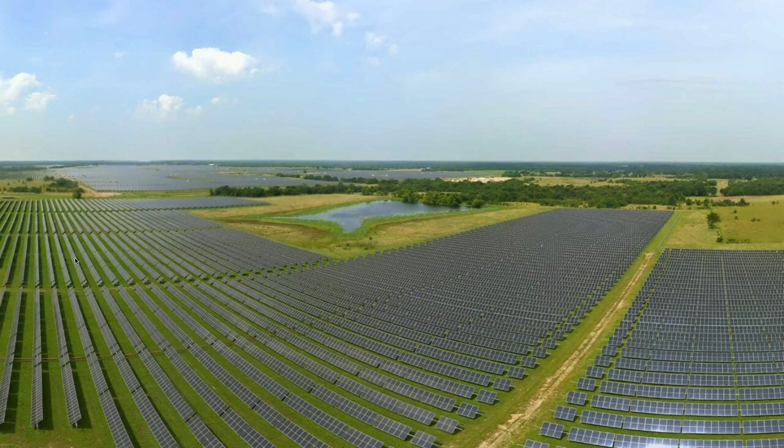And I think it's a gold mine in itself because it's got a huge amount of very valuable and critical materials. But the key is how to do it in a way that has a huge amount more integrity, and how to deal with it in a way that is economical and that can yield better results. So I'm going to share my vision with you today.

I'm a climate entrepreneur. I founded a group called the Longevity Partners Group, which was one of the fastest growing sustainability advisory businesses in the world. We went from 20 people to about 220 people in the space of 24 months. We've got offices pretty much everywhere, but I've stepped down as the CEO of the group. I'm now a board member to transition and actually focus on something that I'm equally passionate about, which is what we're going to talk about today.

So I've put a few slides together to talk about the current scale of the industry, the risk of sending it to landfill, the environmental cost of making solar panels. A lot of the stuff that we talked about today, it's not quite a repetition, but I'm going to do a bit of a deep dive into it. The scale of the issue, the methodologies that are being used today, are they right for tomorrow? And there's also a huge timing issue when it comes to solar panel recycling. The requirements from off-takers, and I'll talk about what the future looks like and the vision.

My other mission is to keep you awake, because I know that it's 3 o'clock, and I hope that I can keep you guys entertained.

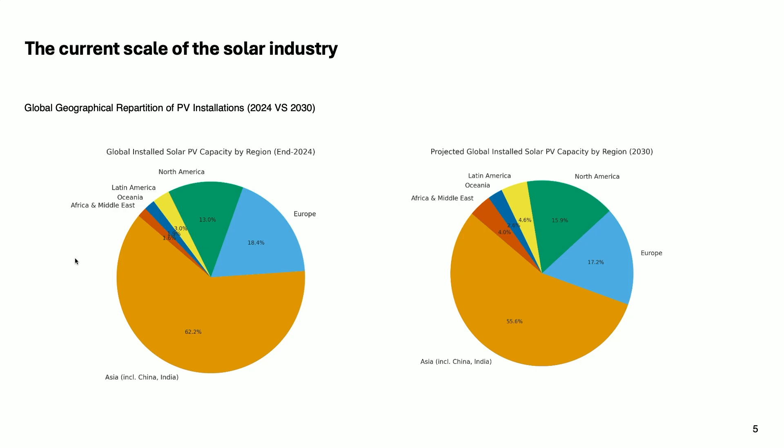So the current landscape of the solar industry, now versus 2030, or at the end of 2024, you can see that it's still very much dominated by China. And obviously, China is very opaque in terms of solar panel recycling. Nobody really knows what's going on over there. But it's certainly a challenge. And we know that they're very advanced when it comes to manufacturing and processing and robotics, et cetera. So we should hope that they're going to do something about it.

But what we can see that's quite interesting, I don't quite know. I'm actually going to talk about laser later, but I don't know where the laser is on this one. Oh, yeah, here we go.

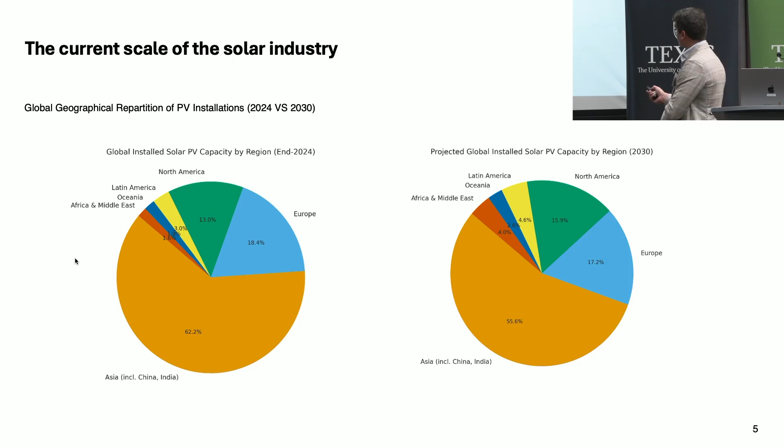We can see that the share of global renewables is reducing in Europe and increasing in North America. So that's basically the trend and where things are going. Obviously, Africa, Middle East, Latin America and Oceania are also growing.

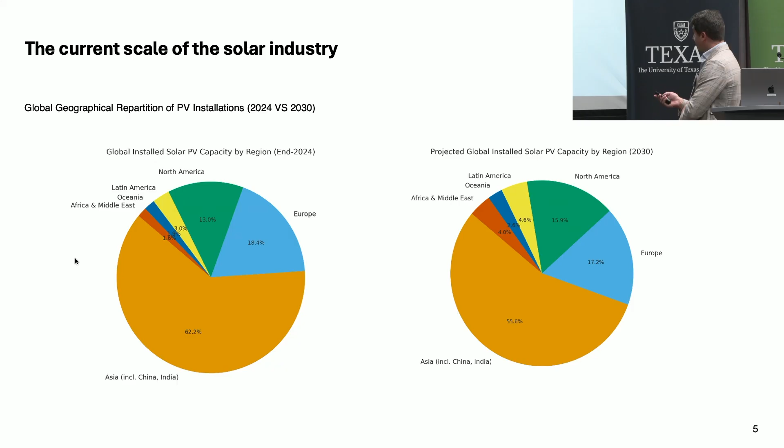So what's the real risk of sending the panels to landfill? The main risk is contamination. You've got an environmental risk through leaching, mainly from the cadmium telluride, the lead, the copper indium gallium selenide, CIGS films. And that leaching cannot be permitted because it has a negative impact on the environment.

But I think the biggest systemic issue is that you would be in breach of your European taxonomy and SFDR impact investment requirements. So, for example, if you have an infrastructure fund that invests primarily in renewable energy and you're basically causing significant harm, that's the concept of do no significant harm, you can actually be in breach of your SFDR regulation.

And what you can get on the back of that is claims of greenwashing. We've seen with Deutsche Bank, DWS, a few years ago, when they had a claim of greenwashing, the share price went down by 13%. So you can have basically one project that takes down a big chunk of the value. So if there are any large-scale or infrastructure investors in the room, that's one that you need to take into account.

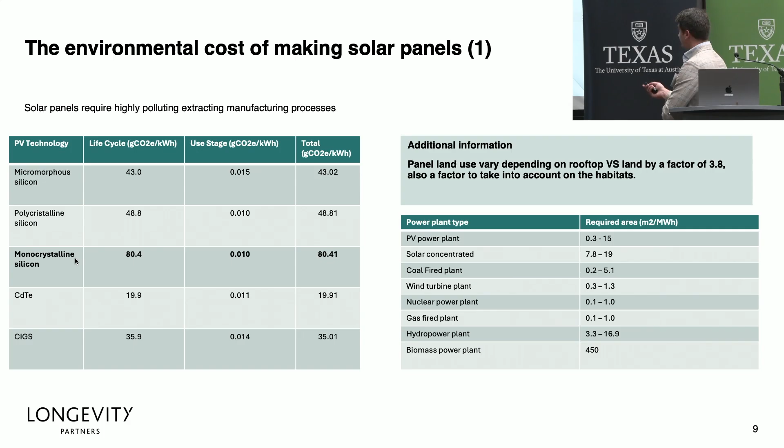We also talked earlier about the amount of land and the density of power production. And you can see that solar PV, obviously 0.3 would be for rooftop PV installations, but the required area in square meters per megawatt hour is one of the largest out there. The second largest after concentrated solar, and then hydropower plants and biomass plants. But if you compare it to wind turbines, coal-fired plants, gas-fired plants, nuclear power plants, it uses a lot more land.

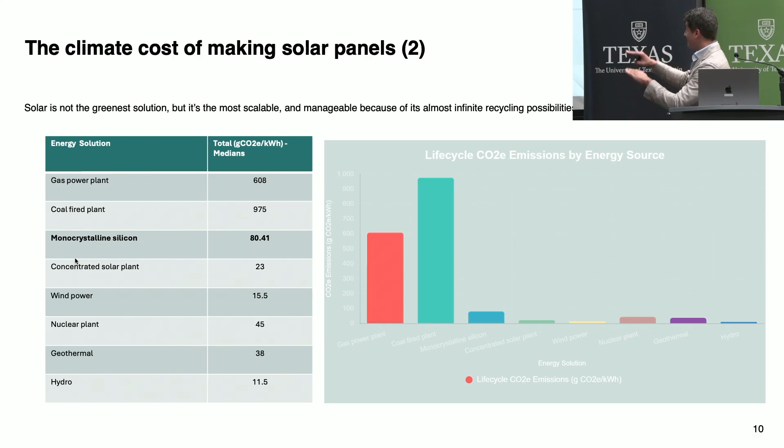So that's how it compares in terms of the life cycle of installations. So, the gas plants are better than the coal-fired plants. So that's the magnitude. But then here you can see that monocrystalline silicon actually has got a higher LCA compared to wind, nuclear, geothermal.

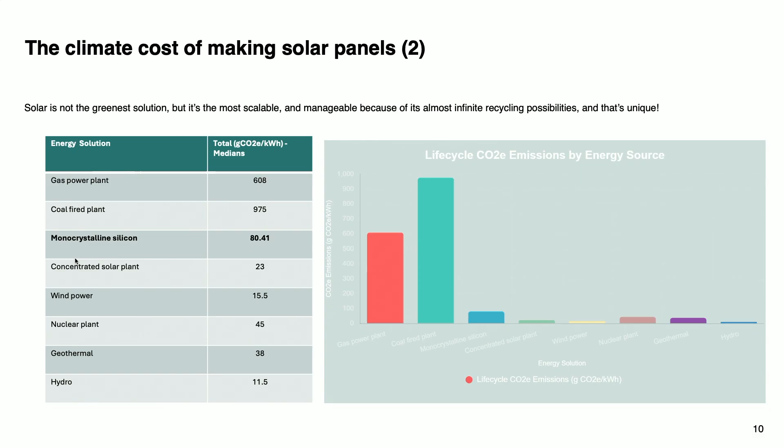And the reason for that is because of the extraction of those materials, right? It's all about the extraction of silicon that requires heavy processes. But once you recycle those materials, and once those recycled materials are reintegrated in the manufacturing systems, then that changes everything. That makes solar PV one of the greenest out there, and that's the vision for this project.

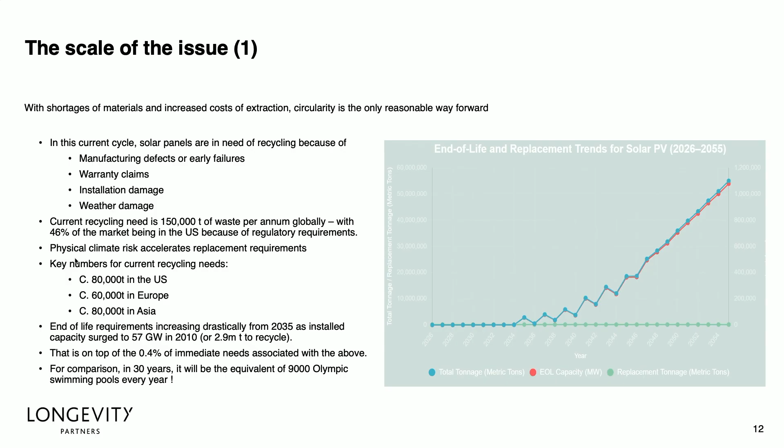So the scale of the issue is going to be exponential from 2035. So you can see here at the moment, there's what I call the replacement tonnage. We don't necessarily see it like that, but solar panels do break, or they're faulty, or people on the installation teams break them. Imagine you have a pallet that falls off the truck, and you still need to do something with those panels. And that's the replacement tonnage, which is about 0.4% of all installed capacity.

So that means that by the end of the decade, by 2030, there's going to be 0.4% of 1 terawatt of solar panels that will need to be replaced. And that's warranty claims, manufacturing defects and early failures, installation damage, but also weather damage. What people don't really think about is the hailstorms, the tornadoes, the winds, and every time you've got an extreme weather event, your installation, which is basically in a rural area, is also subject to being damaged, and that creates a bit of feedstock.

So last year, it was about 150,000 tons of solar panels that needed to be recycled. I think the actual needs, if you split them per region, are a bit higher, but there's a lot that gets diverted and gets to landfill. But by the end of 2034, so by 2035, it's basically 25 years after the first panels were installed. In Europe, certainly it was 2010. It started a tiny bit earlier in Germany.

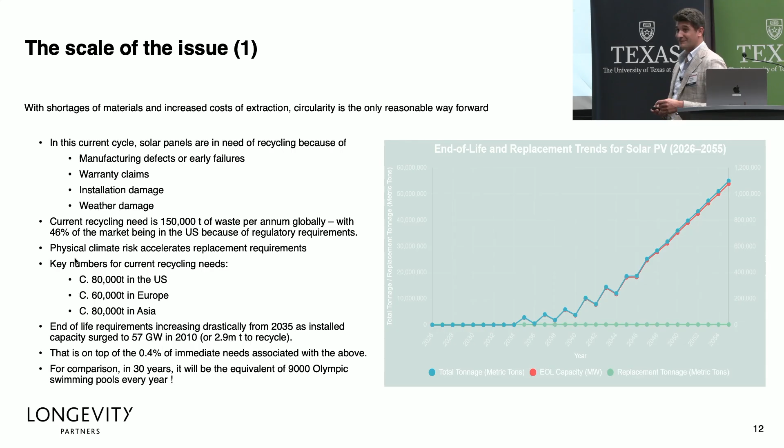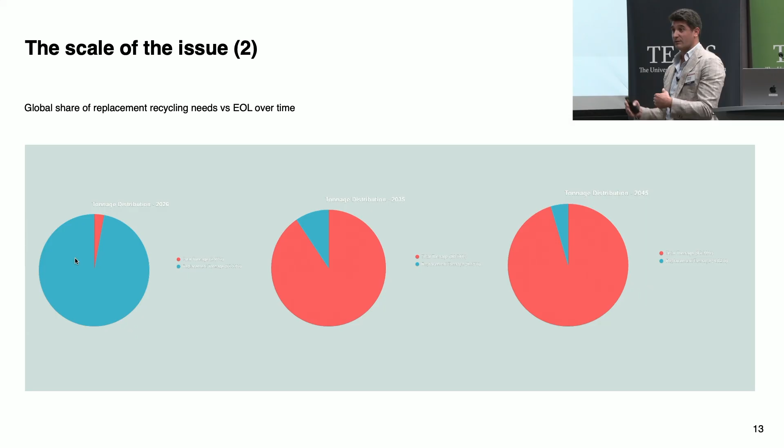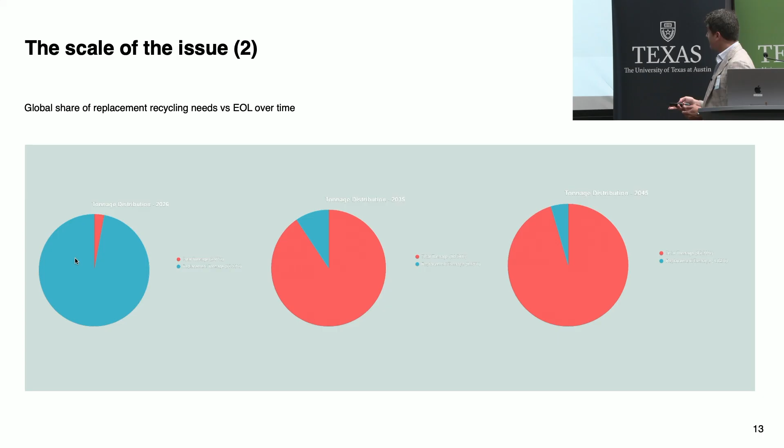In 30 years, by 2055, it'll be the equivalent of, I mentioned a third of the Everest every year, but that's also equivalent to 9,000 Olympic swimming pools. So at the moment, the tonnage of recycling requirements is all about the replacement. But in 2035, that's completely inverted, so the bulk of it will be end of life. Because of the increased number of installations by 2035, that replacement level comes down. So at the moment, a lot of replacements due to warranty, weather, panels being broken on site, and then moving straight to full end of life.

So how are solar panels recycled? People sometimes say, hey, it's difficult to recycle solar panels. I've heard, oh, it's impossible to recycle solar panels. Actually, that's not true. You can recycle solar panels to more than 95%; some companies reach 99.5%. But the key is not necessarily to have the highest percentage of recycling, which is a big problem to resolve. It's already a good thing compared to not doing anything.

But the real key is how you reintegrate each of the materials and repackage them so that you can get the maximum value out of them. In the panels you have silver, which is trading at $1.5 million a ton at the moment.

Obviously depending on whether they're CdTe panels, you've got the silicon, you've got the aluminum, you've got the copper, and in some cases in inverters you've got some rare earths and antimony as well, which is a critical mineral for the defense industry.

So the idea is to have the ability, through science essentially, to extract those materials to make sure that you create a sustainable supply chain for the United States and other countries, so that we're not entirely reliant on China for importing all these technologies. Now that the materials have been mined and they're in this country, we have the ability to basically reutilize them and dispatch them in loads of different supply chains

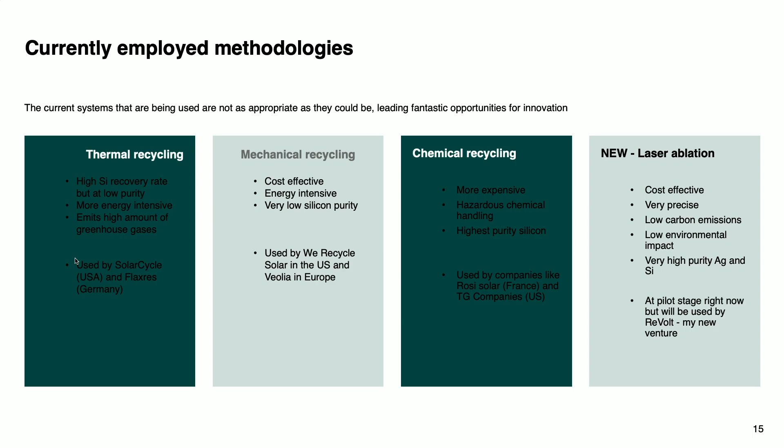So we'll certainly be looking at all the different technologies and how we can improve the process between now and later. The key for the moment is to meet the requirements of those big companies that are driving everything nowadays, the stock markets, our lives, our phones, our everything. And these guys have got requirements in terms of energy. The United States will need to add, between now and 2040, about 300 gigawatts worth of power. You're all energy people, so you understand what 300 gigawatts is.

I was at the Nuclear Summit a couple of weeks ago, one of the largest nuclear conferences in the world. There were nearly 800 people. And there was a question for the audience: who thinks there's going to be 5 gigawatts of nuclear built in the next 10 years? Everybody raised their hands. The next question was, who thinks there's going to be 10 gigawatts of nuclear built in the next 10 years? Still a lot of people.

But when the guy asked who thinks there's going to be 15 gigawatts of nuclear power built in the next 10 years, suddenly hardly anyone raised their hands. So the chance that we get 10 gigawatts from nuclear is very real, but then you still have 290 gigawatts of power that needs to be produced in this country to meet demand from the population, but also data centers and industry. And looking at the scale and the speed of scaling that solar can offer, solar is never going to be the only solution, but it's definitely part of the solution.

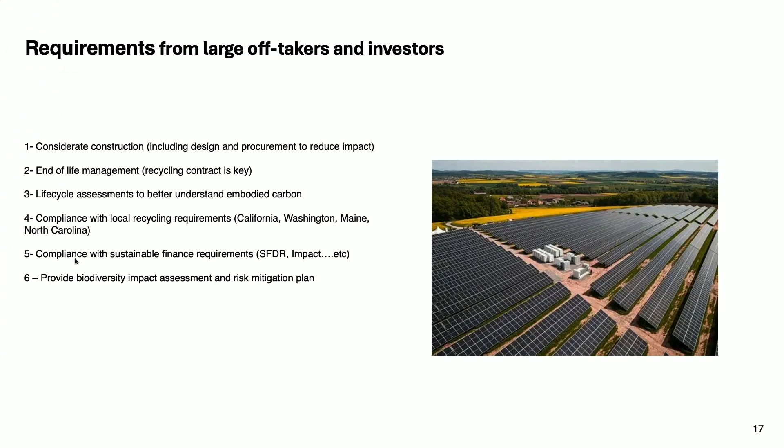So the key requirements from these companies are basically considerate constructions. I think Andy said earlier, there's good developers and not as good developers, or I can't quite remember how you put it. But basically, it's all about making sure that you have a very ethical and considerate design system, that you're managing things properly during the lifetime of the installations.

I've seen developers literally deforesting hundreds, if not 1,000 acres of beautiful, pristine Central Texas post oaks, and there's no plan for the wood. These are the kind of challenges that we're also facing. But I think there's ways of reutilizing, and there's a way of having a circular economy mindset to actually say, you know what, there was nature here, nature has its purpose, we can actually take that wood and repurpose it and do something with it and actually be responsible about it.

And I think that there's a lot of companies that will start being exposed, and there's going to be a reputational risk associated with potentially doing stuff the wrong way. So I think it's very important to do things properly. I think they're going to ask for end-of-life management. We're seeing it nowadays. For Microsoft, it's very important. They buy a huge amount of carbon credits every year.

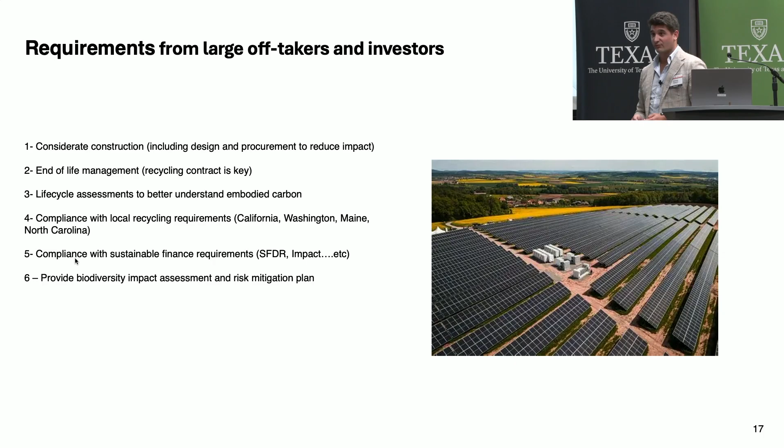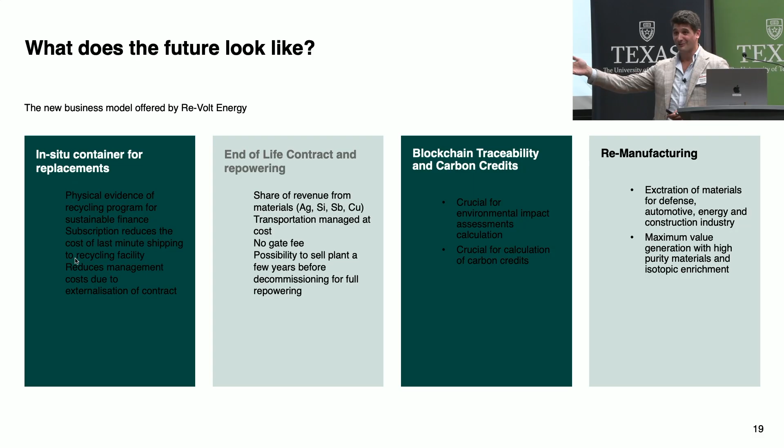The other thing, which I think is quite good for developers, is to provide a biodiversity assessment, because if you're going to be literally deforesting 1,000 acres of pristine land, you need to have a plan for what to do with it. So for what the future looks like, I think the key is to provide physical evidence that there's a recycling program, not just say, hey, we recycle our panels, but then you look at the site and suddenly you can see that there's a mountain of used panels leaching on the floor, that needs to be put in a container, that needs to be managed properly, and then there needs to be a proper supply chain for it.

I think having in-situ containers will also reduce the cost of dealing with the waste, because at the moment, the waste companies are charging a huge amount of money, $70,000 per megawatt to send it to landfill, and up to $200,000 per megawatt for recycling. So there's a huge gate fee.

My business model is very different in the sense that there will be almost a subscription. We would send the container, you put all your panels in the container when they're broken or when they need to be removed. You could give us a call. There's a QR code that would be on the container. There would be full traceability that will be blockchain enabled, so that if, I don't know, the aluminum ends up in another product, at least we'll be able to trace everything from its source.

And then having that sort of subscription model is quite good, because you're not subject to those things. The other thing that I want to do is to give a share of revenue of the materials. So, obviously silver is trading at 1.5 million a ton.

You've got aluminium that has a lot of value, antimony with a lot of value as well. I don't see any reason why some of that money couldn't be going back to the developer or the asset owner or the local communities, to basically boost local education, health, and well-being, or any other programs. There'll be no gate fees, and there's also going to be a possibility.

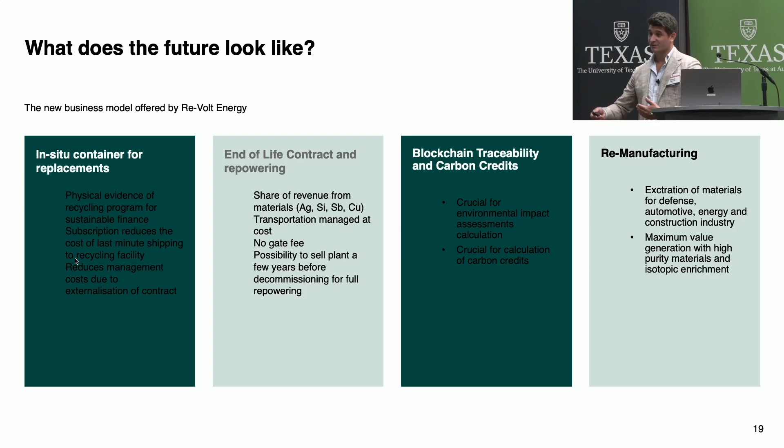And then remanufacturing. I think there's a lot of very good materials in the panels that can be used for defense, automotive, energy, construction industries. So the idea is to take the materials out as they are. You can enrich some of the materials, and you can purify some of the materials, and then put them back on the supply chain to make sure that you get the best value for it.

So the vision, we talked about the Permian Basin earlier, and the idea for us is to put our first site for Re-Volt Energy, which is the new vehicle that I founded recently. The site is located in the Permian Basin, so the idea is to have a socio-economic mission associated with it, partnering with a foundation to basically boost long-term employment and thinking about the energy sector beyond extraction of oil and gas.

What I'm spending a lot of time doing at the moment is securing waste management contracts with O&M companies, developers, and manufacturers. So if you own PV plants, or if you are an O&M company, or if you know anyone with a lot of solar panels, and you're interested in having a highly ethical, responsible way of dealing with your waste, then come and talk to me.

But again, it's also about continuing to invest in and investigate the technologies to make sure that we're ready for 2035. So we don't need to have the solution right now, but we have to plan for the future. And then obviously, we see a lot of batteries that are now being made with silicon anodes, and there's loads of different innovations in batteries. And there's also a lot of lithium in the Permian Basin. So, my vision is recycling solar panels, recycling batteries, and creating, in the Permian Basin, a massive hub for America for the batteries of tomorrow.